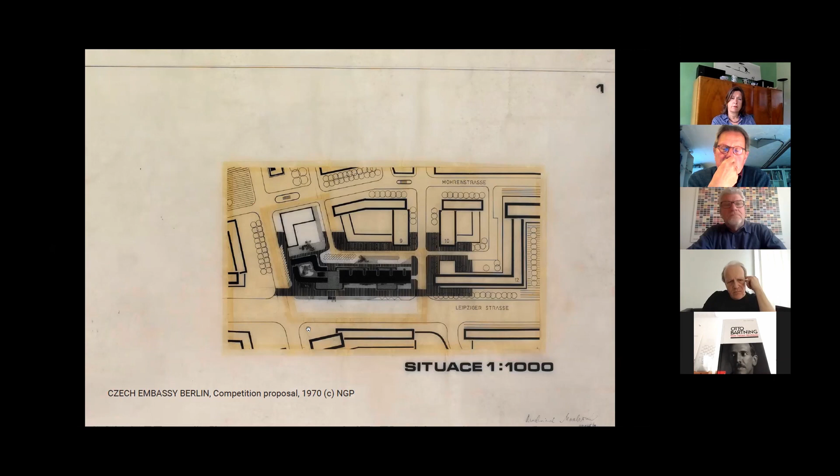This is the view of the competition proposal, which was the first version for a plot on Leipziger Straße in the proximity of the residential compound.

It was a long slab volume, and the bold composition divided the volume in two parts. It was founded on a few load-bearing reinforced concrete cores. The structures were revealed by omitting one floor, which you can see here.

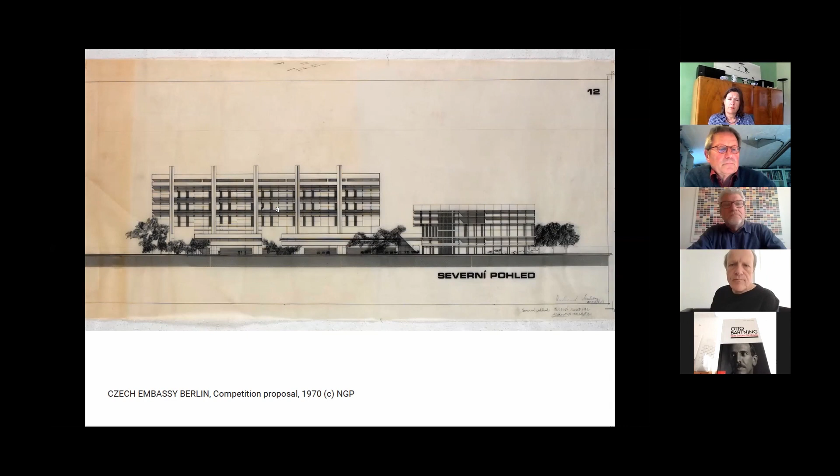The main volume is fully developed from the 4th to the 10th floor. In the lower base, there was a cultural background and hotel, and here is like an in-between pavilion as well. So it's a very interesting sculpture, which unfortunately was not built. What was built was then the Czech Embassy.

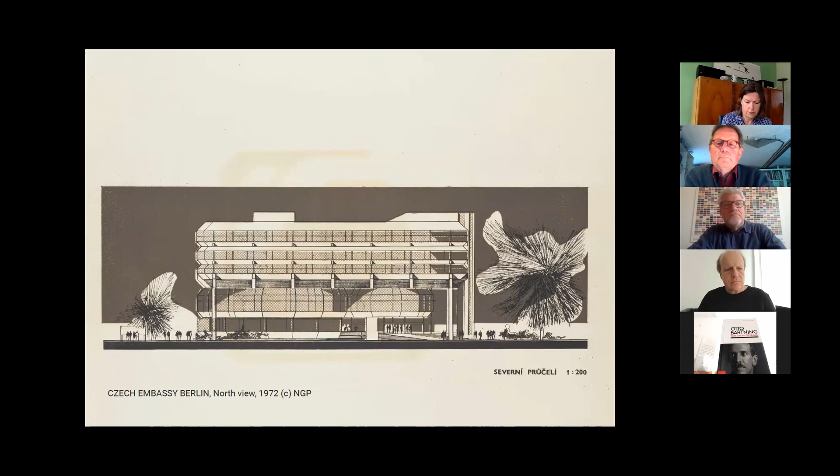This is like the first proposal for the new plot, which was just around the corner. It was designed on an almost square floor plan with diagonal division in floor plan and architectural space. The wings are of an unequal height, as you can see here, and they differentiate the views from different sides.

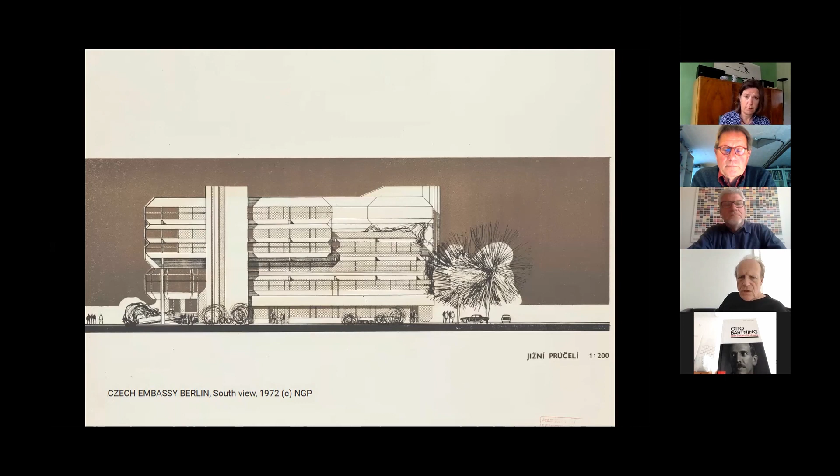There is this specialty of the Machoninovi, the circular sort of auditorium, which they already projected in the Thermal Festival Hotel. And the facade, as you know, is distinctly sculpted with tiles made of Liberec granite and large-scale glass windows.

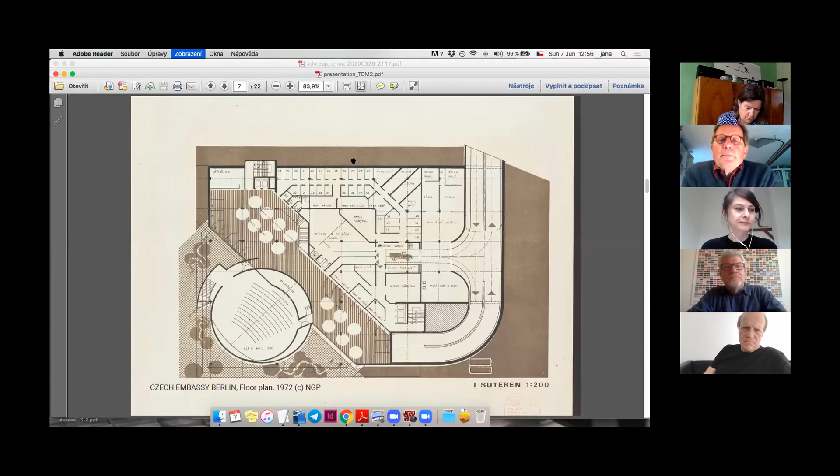If I come back to my presentation, at the moment there's an exhibition in Prague I curated together with my co-curators from the Czech Technical University and Radomíra Sedláková, who's also a curator at the architecture collection in Prague.

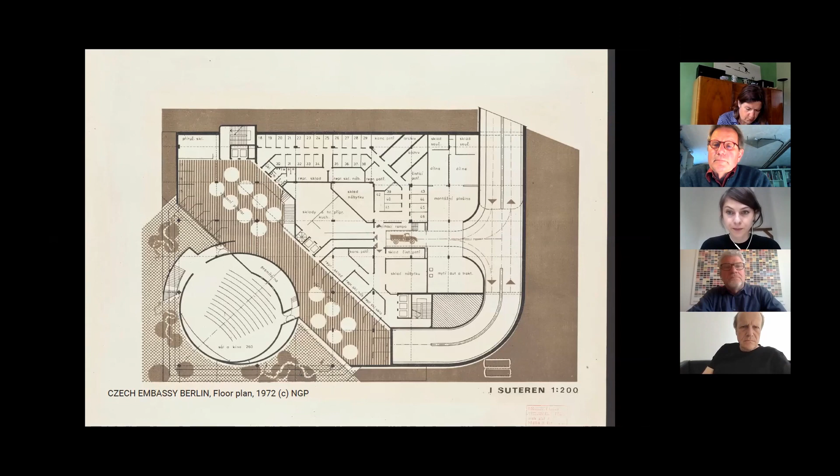The exhibition is called No Demolitions: Forms of Brutalism in Prague. It was open and then closed 4 days after it opened. But now we reopened, and it runs through November.

So obviously the brutalist architecture is glorified and deplored, and has become a heatedly discussed and controversial subject. To an extent, in Prague, it's a publicly understandable name, even though from the expert point of view, brutalism is something that took place strictly in Britain and in the US. I think the architects in Prague were more or less influenced by brutalism, not that they would be the real brutalist architects.

There is, for example, a specific like the use of concrete only to an extent, but you have these large volumes that are being used by the figurative or sculptural architecture.

The construction is being shown, as well as the authenticity of materials and so on. So it does comply with this brutalist sort of 3 rules stated by Reyner Banham.

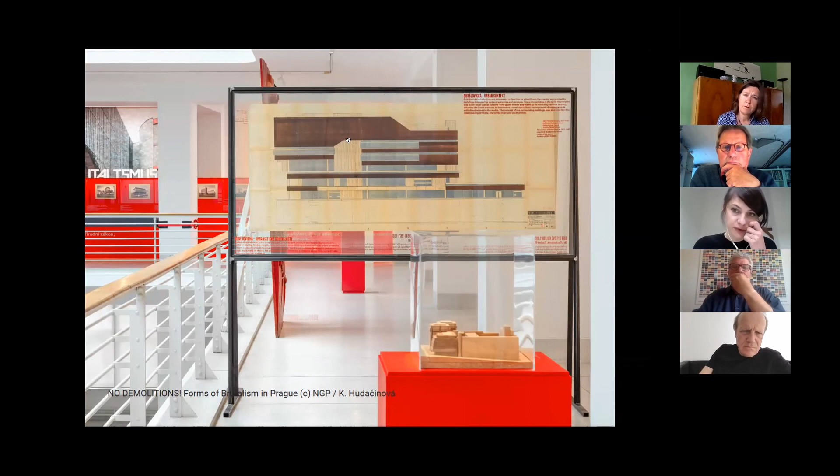Then there's this structure, I would say a superstructure by Karel Prager. It's a planning study, an urban planning study for the redevelopment of Košírské údolí Valley from 1973. Its objective was to explore the possibilities of building up areas of Prague with adverse conditions for development.

It was conceived as a specific urban planning sociological project that counted on the use of load-bearing superstructures made of reinforced concrete built above the existing developed area of Košíře. They incorporated housing units, office buildings, and other necessary facilities. So it's quite a visionary project we have in models.

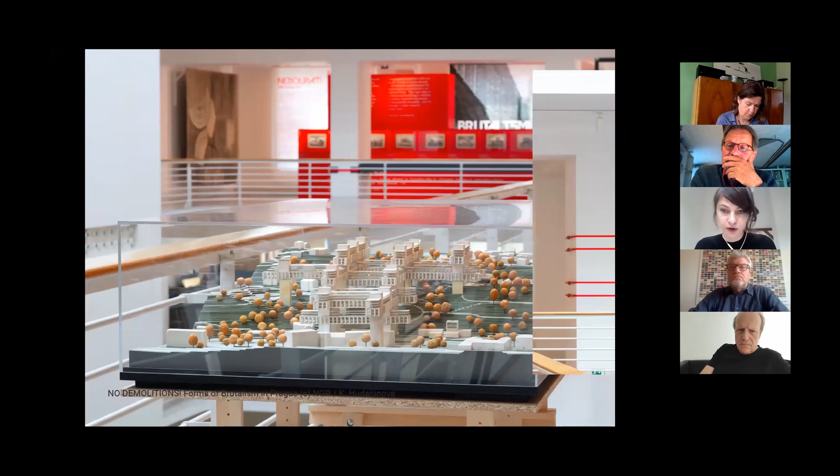Then we have the former Federal Assembly in a number of plans and visualizations.

As I said, there are some artworks in the exhibition, and then we have a video, a loop that runs over 4 minutes, capturing the erosion of Transgas, because these buildings influenced by brutalism fall fairly easily victim to insensitive radical conversions, as I mentioned.

In Prague, this is particularly the case of demolitions of the Hotel Praha, the Invalidovna Mazut heating plant, the telephone exchange office in Dejvice, and most recently the Transgas complex. And there are these devastating conversions of Omnipol, Mercuria, Motokov, and so forth, and so on.

So it's an ongoing issue, and there are other initiatives in Brno. This exhibition was mostly concerned with Prague. It's an ongoing debate.

I can only now show you the teaser for the exhibition, which is part of the loop.

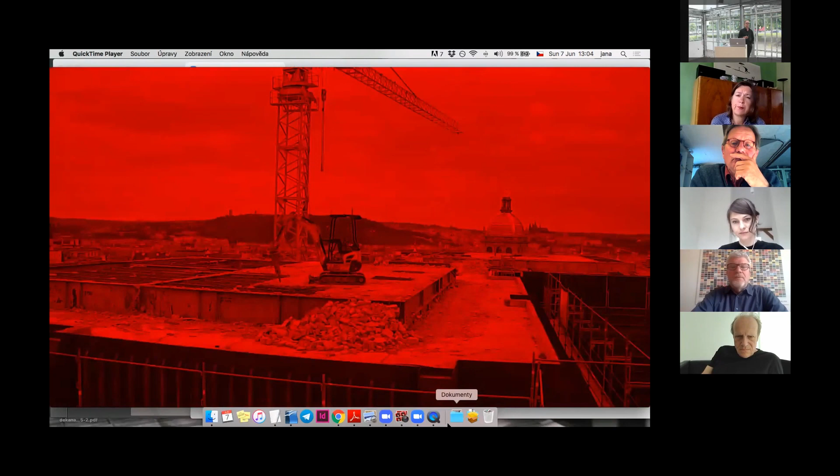So this video then takes 4 minutes, and I would show you these 4 minutes, but I assume we don't have that much time.